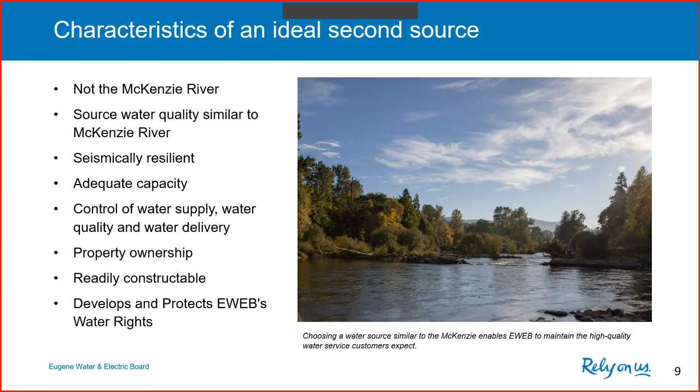With that, I'm going to move over to Laura Farthing.

Hi, I'm Laura Farthing. I'm a principal engineer here at EWEB, and I'm the project manager for this project.

So I'm going to go over the alternatives. We did a pretty comprehensive summary in our memo, so I'm going to cover this at a high level, but please ask questions as we're talking if you want to go over more details.

I think I'll start with the groundwater. So we do have groundwater wells. We have a permit to use them. They have a capacity of about 12 million gallons a day.

They have issues that they can impact other water rights, other users of water rights, particularly SUB and Rainbow water districts. So to develop those well fields, we would have to have agreements in place that allow us to impact their wells.

There's also some water quality issues. We tested the wells that we have now just recently, a few weeks ago, and we did find that there are some contaminants that, while they're below the reporting limit, would be of concern if we were to develop them. So it would likely require advanced treatment. And then, as Karen mentioned, with the similar source requirement, groundwater is a very different source quality than surface water, so we would have to have some sort of blending facility to put that into our distribution system.

We also, in the past and even recently, have been talking about options using property that we have out by Hayden Bridge. This would involve building a redundant intake and treatment plant. This, of course, has the big issue that it is not a redundant source to McKenzie. It would give us treatment redundancy and intake redundancy, but we still would be reliant on the same river source.

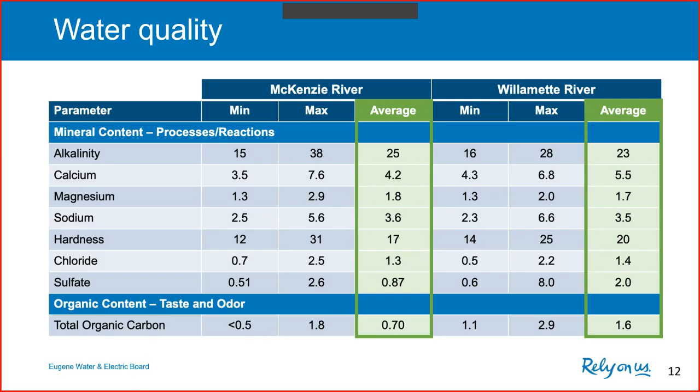So really the scope of the Willamette treatment plant, it's 3 projects under one umbrella. Right now we're looking at building an intake that's sized for 30 million gallons a day. That's the maximum water rights that we anticipate we'll have. The reason being permitting is very challenging.

So we have already submitted our environmental permits. We permitted to the maximum use that we could have, and that just sets us up in the future so that if we do expand our capacity, we don't have to go back through the environmental permitting process.

It includes a new treatment plant, and then it also will include a new transmission main that runs through Glenwood and connects in at Knickerbocker Bridge. This allows us to bring water into our new base level storage system without a river crossing and connects directly into the transmission system in Eugene.

So for the treatment plant, there's been a variety of capacities that have been analyzed throughout the history of EWEB. We've looked at treatment plants from 10 million gallons a day all the way up to 30 million gallons a day. So the current plan with the preliminary design report completed in 2017 has us building a plant at 10 million gallons a day.

So this really is our life safety minimum, indoor use only for residential customers. That means there'd be mandatory curtailment during all periods of the year if we have to use that as our sole source, and that likely most businesses, industries, and institutions would be closed. That would actually be very hard to regulate.

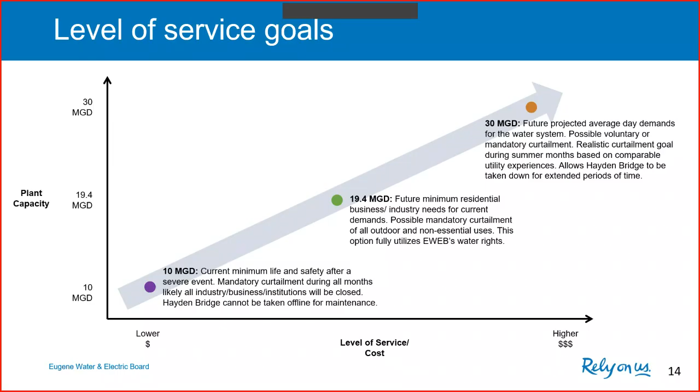So after looking at all of these graphs, we think it's important to reevaluate the assumptions we had from the original preliminary design report from 2017. It has been almost a decade. Our demands have leveled off, but we have seen those lower wintertime demands inching up slightly. So we are looking at evaluating a 10, about 20, and 30 MGD plant with a preliminary design so that we can look at costs and rate of return we would get from that investment.

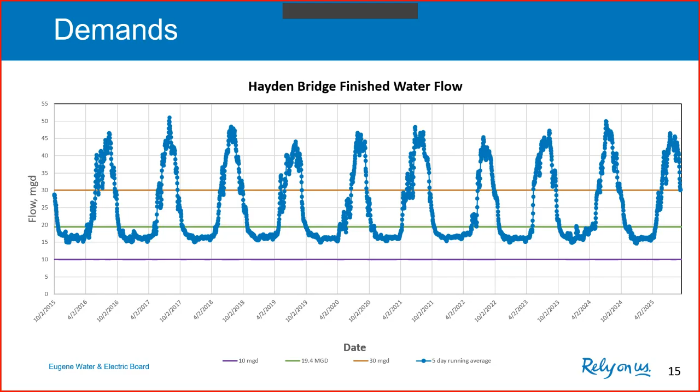This is a big project, and controlling costs is a very important aspect of it. As a project team, we believe in actively managing our projects and setting clear expectations at the beginning. It's one of the main tools we use for outlining exactly what we need, what are nice to haves, and how we evaluate every option.

In this scenario, we already have our consultant working on updating the baseline cost estimate that we brought to you this spring so we can get newer numbers. They've worked on quite a few water treatment plant projects that are currently out to bid or in the bidding process, so we'll be able to pull on that experience.

Really, at every option and decision we have, we're taking it back to what that baseline is and what we got for it, and looking at the overall cost. So when anything is going to increase the overall cost of the project, we will look at what that cost is, the rate of return, and the financial impacts to the utility, so we can make informed decisions about whether it's needed and how we will control those.

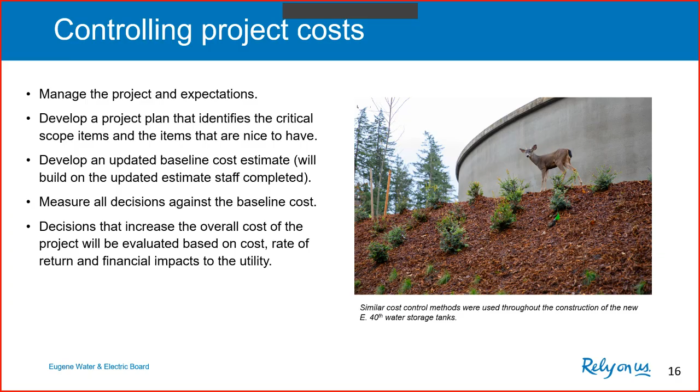The numbers I'm going to cover in the next two slides are preliminary and will likely change once we have the 30% design complete. You can expect a more in-depth conversation about the financial impacts of this project come June, when we present the key points of the design to you.

The numbers shown here will change as the design progresses. Like I mentioned earlier, we'll be back in June with more information.

But for now, with an investment of $160 million, we are looking at a 10-year cumulative rate increase of 37.2%, which equates to $16 more per month at the end of that 10-year period for the average single-family residence. Projected increases already show rates moving from $44 to $68 at the end of the 10-year period, all on their own, not with the second source. So when you add that second source in, at the end of the 10-year period, that's another $16. So we move from today's $44 to a total of $84.

The investment would stress our debt service coverage, but it is still within our current target, which is 2 to 2.5 times. Again, we will know more once we have that 30% design and have time to look into options to smooth these rates at that point.

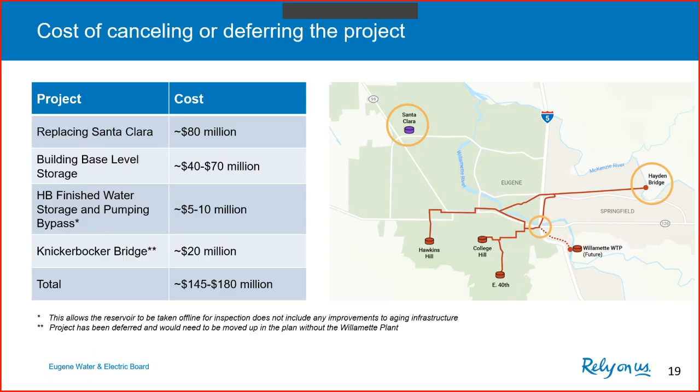But Coast Fork's on a DEQ moratorium right now because they've got a problem polluting the rivers. We've got 3 dairies up there, and 4 municipal sewage treatment plants that dump in above our intake. I've been contacted by people about what happens in the wintertime at high flow, what happens to those big ponds. We've got all those pressures with urban things and short mountains leaching into the Coast Fork and all these risks. What are we going to do to mitigate that?

Well, that's really what the preliminary design process is for. We have a long record of water quality sampling on the river, and we're aware of the issues on the Coast Fork. It's about aligning our treatment process and making sure it's robust enough to handle any of those constituents. The Willamette River, the entire Willamette Valley all the way up through Portland, does utilize it as a high quality drinking source. So these are things we can treat. We also will have our source water protection program, which will likely be expanded to the Willamette, which will help.

Part of the process in expanding the source water protection program is identifying those contaminant sources and developing strategies to mitigate against them. The tact we'd take is to look at what those are, what we can do about them, what partners we have already working on them, and how we might move the dial on protecting from those particular contaminant sources that we don't have experience with on the McKenzie.

And the backstop then becomes the treatment system. And then there's the court order to dump all the reservoirs - Fall Creek, Dorena, Cottage Grove, and Lookout - all have to be dumped. In fact, they just started dumping them the other day, and it muddies the river, and you saw what it did downstream. They couldn't even clean the water to drink it.

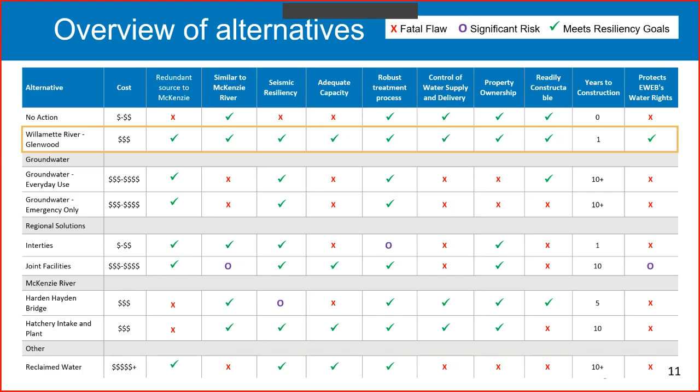Those are the times based on our best estimate of scheduling that we would need to borrow money, and see a significant increase in debt service coverage for 2027 and again in 2030. We wouldn't borrow the entire amount up front because we would have carrying costs. As we understand what the construction would look like, we would fine tune that, but we anticipate multiple borrowings.

I have a question about conservation. Hearing your question makes me think people can plant and water and irrigate whatever they want for their yards, but one strategy is to plant drought resistant plants or just look at their water usage differently. But we're going to have debt that we have to pay back. So how does it translate into encouraging conservation to help people have some agency and control over their bills, versus this enormous cost we're going to have to pay back? I'm curious about the tension between those two things.

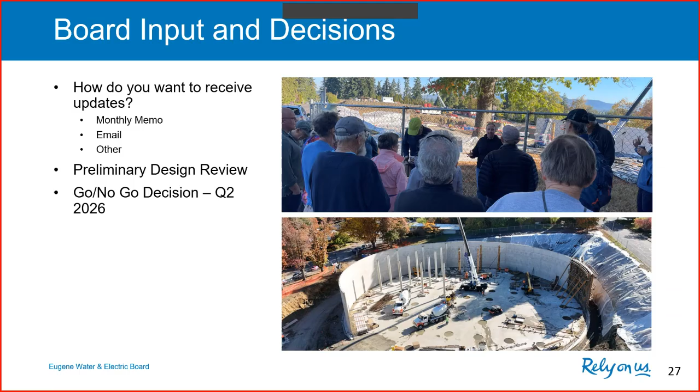I just want to comment on the way to receive the information. One of your suggestions was the monthly memo, and I really like that idea because it keeps it in front of us every month. Right now we might feel like we totally understand where we're at, and then 3 months from now we've done the same kind of thing with other issues, and it's hard to track where we were. So I think monthly memos would be good.

And then I have a question about the land use permitting with the City of Springfield. When did you say we're hoping to get that done by? We're hoping to go to a joint planning commission meeting with Lane County and the City of Springfield, scheduled for their November or December meeting, with the council meeting in January or February. And how long do we continue down this path before we look at our second option?

I think that after we have the joint council meeting, we would need to regroup and make a plan. Okay, thanks.

So it says direction on here, then - I mean, if it's fairly contingent, for me you make a very compelling case. We need to do the secondary source and it needs to be on the Willamette treatment plant. We already have a lot of it - it checks all the boxes literally on the matrix that you outlined. But it does seem like it's very contingent on this decision.